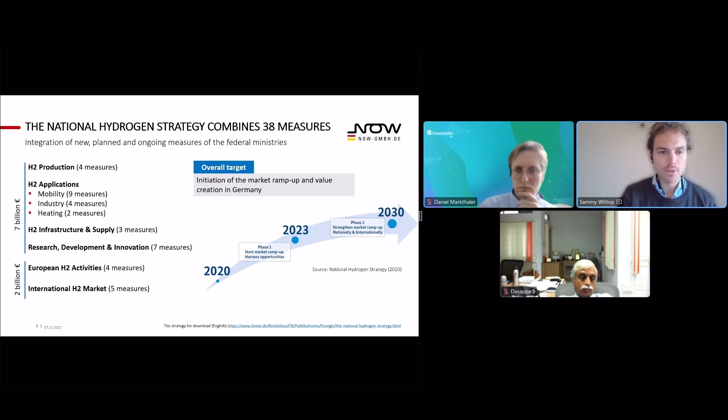This hydrogen strategy started in 2020. The first phase up to 2023 was focusing on the start of the market ramp-up in Germany, harnessing opportunities, making pilot projects in Germany, and from 2023 onwards to 2030, the second phase is focusing on strengthening the market ramp-up and also ramping up national and international hydrogen activities. But today we don't look at every measure. We look into the 9 measures of the mobility sector. And here you have an overview of all these 9 measures in these boxes.

And the color codes on top of the boxes are linked to the pictures on the right side. Black would be fuels, so measures related to hydrogen fuels and synthetic fuels. Red is infrastructure, so for example, the hydrogen fueling stations. And in yellow, you see the vehicles or applications related to hydrogen mobility.

The federal government uses these measures to orientate and implement their hydrogen funding programs to ramp up hydrogen technology in Germany. To give you an overview of some hydrogen funding programs...

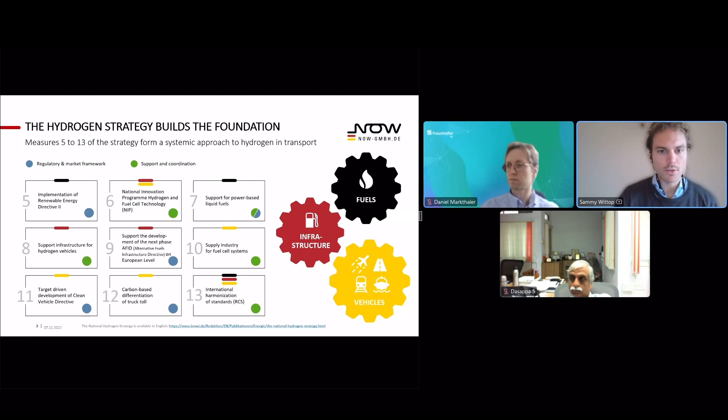We have a look into the funding programs of the Federal Ministry of Transport, BMDV. The BMDV focuses on funding programs along the whole hydrogen value chain, starting with hydrogen production and electricity-based fuels.

The funding volume here is up to 1.5 billion euros until 2024. Commercial vehicle funding guidelines have a funding volume of 1.3 billion, also up to 2024. Buses get funded up to 1.2 billion, also until 2024, and rail transport gets funding of 224 million euros.

In the lower part of this slide, you see the different funding programs of the Federal Ministry of Transport, starting with HyLand Hydrogen Regions in Germany. This is a very interesting integrated funding program which focuses on municipalities and regions in Germany trying to enable the whole hydrogen economy in their area. We will look into this funding program on the next slides in more depth.

IPCEI would be Important Projects of Common European Interest. It basically means we have large hydrogen projects, role model projects in Europe, which get big funding to showcase that the technology is ready and to see in which cases this technology makes sense in Europe.

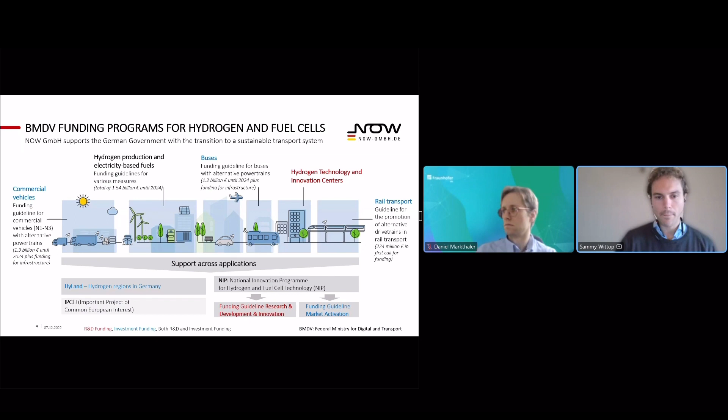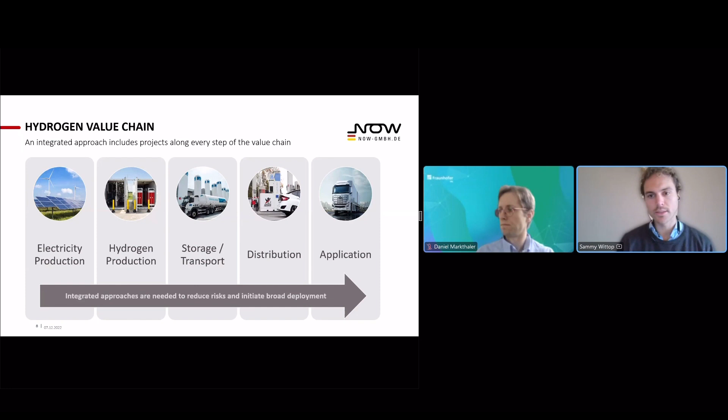With this said, I want to jump into the HyLand regions, the HyLand funding program. HyLand, as I said, is a funding program by the Federal Ministry of Transport, focusing on municipalities and regions in Germany which want to implement their whole hydrogen economy throughout the whole hydrogen value chain, starting from electricity production out of green energy, the production of green hydrogen, the transport and storage of this hydrogen, and the distribution of hydrogen through fueling stations, and also the different applications which can be tested through this funding program in the different regions, for example hydrogen buses, heavy duty vehicles. This HyLand program is focusing on municipalities to enable their own hydrogen economy.

This program has two, or more or less 3 steps. The first would be HyStarter. If a municipality doesn't have any experience with hydrogen, but sees huge potential in their region for hydrogen applications, they would apply for this HyLand program and start as a HyStarter to get experience from other HyLand regions and to think about ways to implement hydrogen in their municipality, in their city.

The second step would be HyExpert. HyExperts have a bit more experience in the hydrogen area, and they maybe already have some pilot projects ongoing in their regions. Through this HyLand program, they get funding up to 400,000 euros to create their own hydrogen concepts for the hydrogen economy in their region.

And the last step would be HyPerformer. HyPerformers are mature in the hydrogen sector, have already some hydrogen technologies implemented, and they're now implementing the whole hydrogen concept in their community.

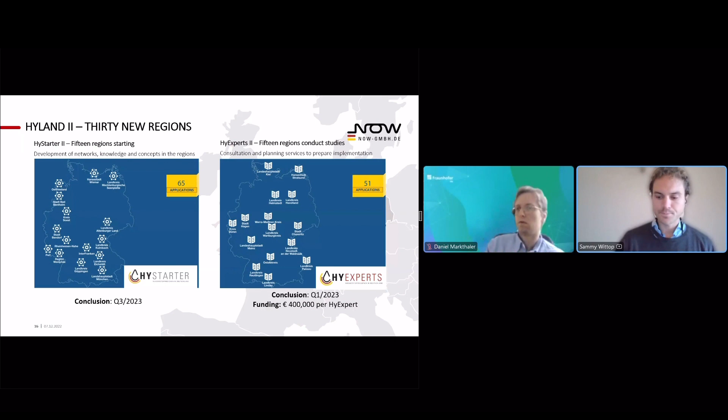To wrap up with this HyLand funding program, I want to show you its benefits. On the one hand, hydrogen regions start to talk about hydrogen, they work with hydrogen and think about how to implement it in their regions. We also have the connection aspect between the regions, so more mature hydrogen regions are somehow role models and share their experience with regions which are maybe not so mature in hydrogen yet. And we also have this huge networking character between all these regions, the visibility the regions get through this hydrogen network.

And to wrap up my presentation, I want to give you some numbers about the deployment rate and the infrastructure in Germany, the hydrogen infrastructure in Germany. These numbers are all based on funded applications.

Starting with fuel cell vehicles, current state November 2022, we have over 2,000 vehicles implemented in Germany, mostly via the funding program NIP, National Innovation Program. Fuel cell buses, we have around 70 buses implemented. Fuel cell trucks are 29 on the road right now. Forklifts, so intralogistics, is a very quickly growing market where you have 180 forklifts implemented plus 150 are in implementation right now.

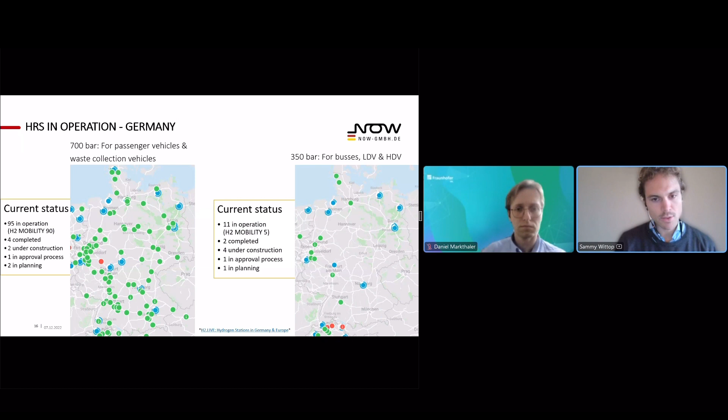To make this more visible for you, I want to show you these two graphics of Germany. On the left side, you see the 700 bar network for passenger vehicles. Passenger vehicles need more compressed hydrogen because they have smaller tanks. And the 350 bar is for buses, which have larger tanks, so they don't need such a high pressure level. Interesting here, on the left picture, you see the western part of Germany has the most dense infrastructure of refueling networks, because there's a lot of industry in this area, so we need a lot of refueling stations here.

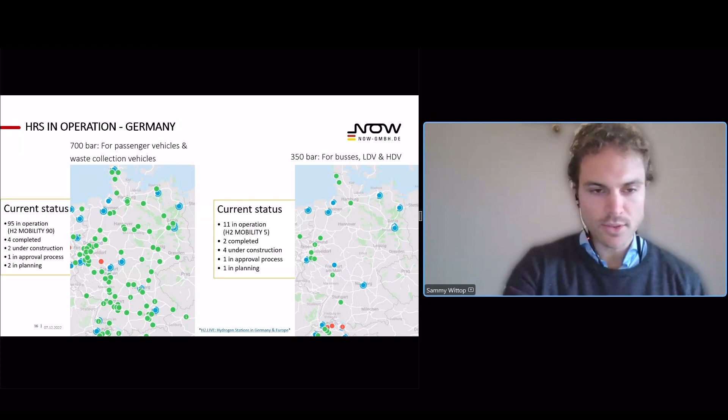So I hope I could give you some insights about the current situation in transport in Germany. If you have any questions, feel free to contact me. Thank you.

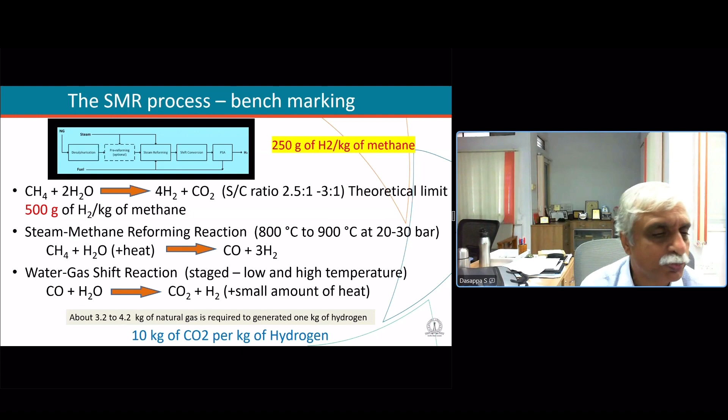In this broad description about the institute where I come from, when we really look at any of these hydrogen or hydrogen related aspects, one very clearly, I think it also came up during the early part of this meeting, is the so-called steam methane reforming as a benchmark. If you look at the chemistry, you theoretically can get close to about 500 grams of hydrogen per kg of methane, but in an actual system, depending upon the capacity, you can get anywhere between 250 to 300 grams, or equivalently about 3 to 4 kilograms of natural gas is required to generate a kg of hydrogen, during which the possibility of emitting close to about 10 kgs of CO2 is expected.

And apart from being hydrogen, I think it also becomes a derivative for various downstream chemicals, which we keep seeing in industrial applications. To some extent, I should also say that there are challenges even for an SMR process, which has generated hydrogen rich syngas, and separation and meeting the requirements of a fuel cell is a tall order. This is something which we need to keep in mind.

Most of the fuel cells which have been operated have used other resources, which you get clearly from electrolysis or something similar. But very limited work has been done to see whether an SMR process going into a fuel cell is feasible - it's not that it's impossible, but very limited work has been done. Keeping this in mind, I thought I should introduce another fuel called biomass, which is a carbon-hydrogen matrix, one of the other naturally available resources wherein you have hydrogen as an element, like water is another natural resource.

When we really want to compare biomass with methane: biomass contains about 65 grams of hydrogen per kilogram, while methane has about 250 grams. And water, as mentioned previously, has about 100 grams of hydrogen per kg of water. This is what you can really look at.

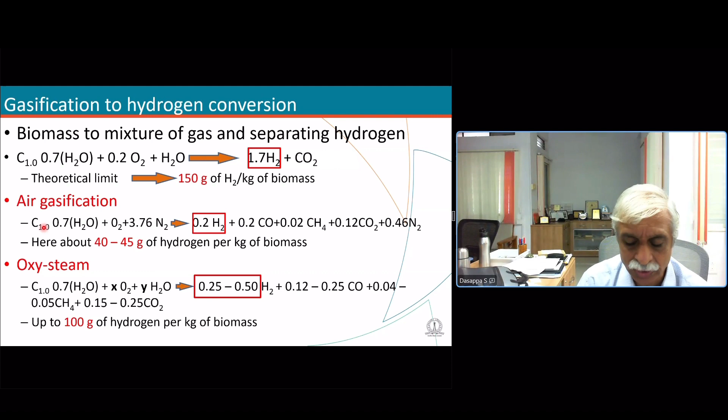But at IISc, we have been able to achieve in excess of about 100 grams of hydrogen per kg of biomass, building on our earlier work on air gasification and moving into oxysteam, so that nitrogen can be eliminated.

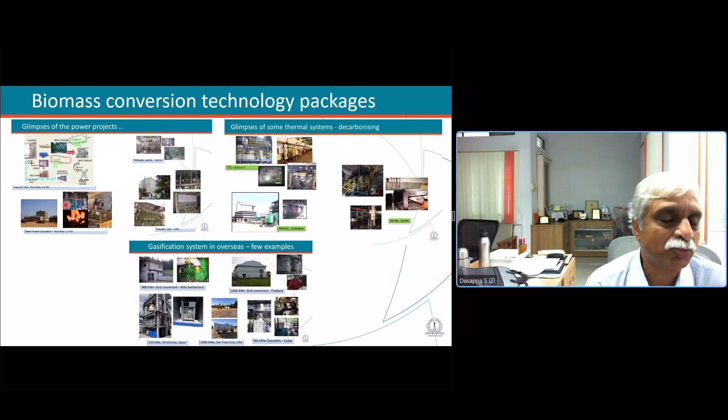The work we've been doing is not far off from that in terms of scaling and other aspects. That means even if you want a scaled-up version for hydrogen, there should be a possibility. The gas quality shown is capable of operating turbocharged engines, which probably is still not as acceptable for a fuel cell, as you'll see in the subsequent slides.

From biomass, you have CH1 to 1.4 as a carbon to hydrogen ratio. Unlike steam methane reforming, with air gasification on a molar basis you get a CO to H2 ratio, and with oxysteam you can control it further. This is very useful when you want to synthesize this gas into chemicals. The CO to H2 ratio can be controlled so you can get into methanol or other downstream products.

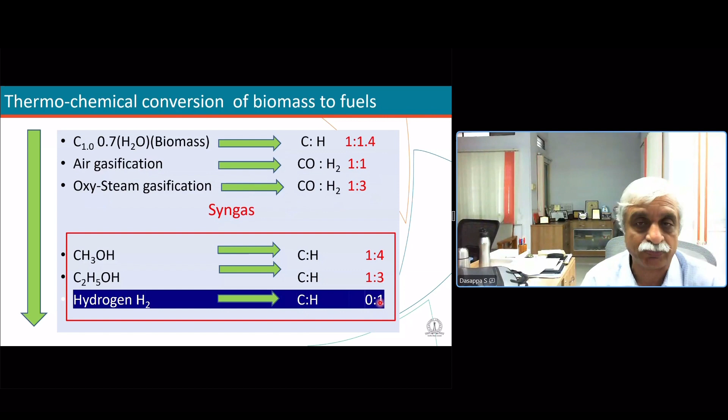When we go into so-called hydrogen production, all the carbon needs to be eliminated so that you're left with only hydrogen. Today we have achieved a process where, with process control parameters, you can achieve different gas compositions by controlling the process within the system.

And we have tried out with a medium density like wood chips, a very high density called coconut shell, and a very low density called corn cobs. I think these are the feedstocks which have been used, and we have been able to get gas compositions, and all this data is intermingled with all the three processes which are there.

And this is what we want to see: whether we can replicate what an SMR process is doing with a fossil fuel using a biomass which has a very low C to H2 ratio. I think it's something which we have been looking at. That means we can look at all the necessary chemicals which can be generated using similar things.

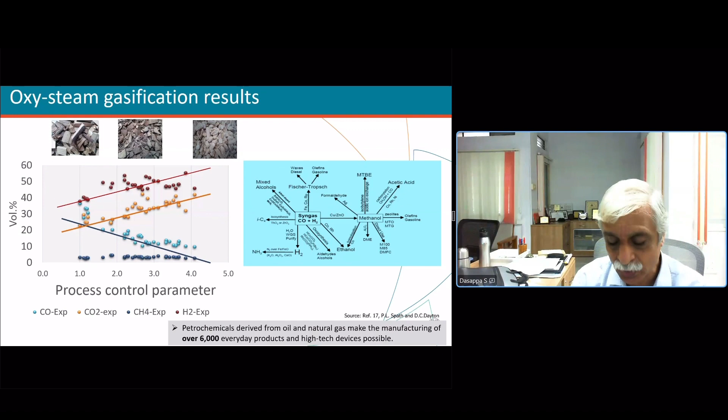Our major target was to see whether we will be able to get the so-called specifications for fuel cells. I think that has been a challenge, probably not only in India, across the globe actually. Today we have been able to meet the ISO specifications to operate a fuel cell using hydrogen generated through a thermochemical conversion process, and we have established the entire protocols for evaluating this quality.

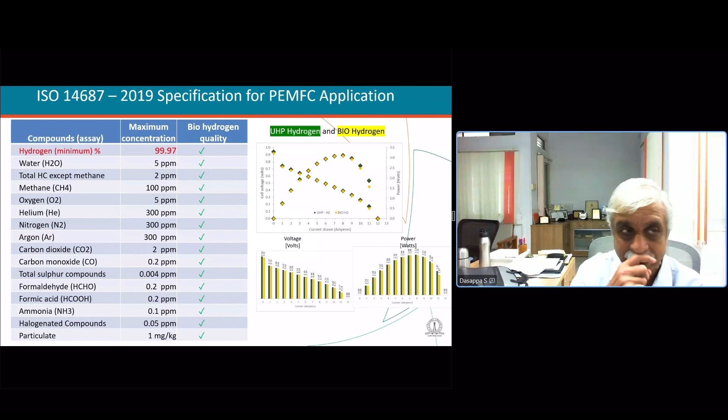We believe that today the technology is available, and as far as IISc is concerned, within the Indian context, we are wanting to set up a 10 kg per hour hydrogen generation capability to fuel a fuel cell bus, which is going to shuttle between some very important places in Delhi. This is something which is coming up.

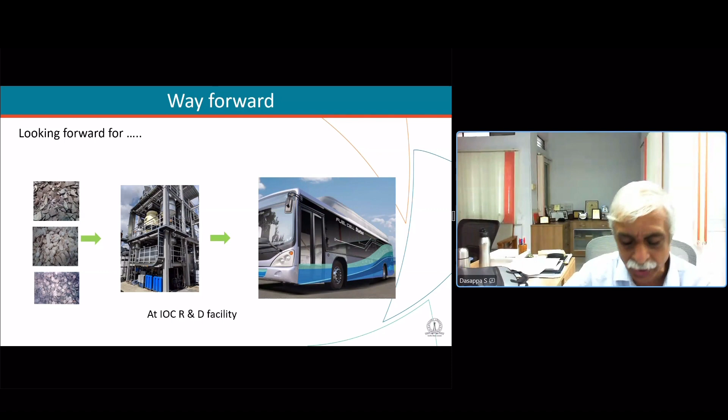While I'm talking about the technology, there is also a concern showcased by various groups across the globe asking whether biomass-based generation of hydrogen is green. And if you really look at the global warming potential, if you have a rotational crop of 1 year, the GWP is 0. And even at the end of 10 years, the factor is 0.04. I think this is something which we need to be aware of.

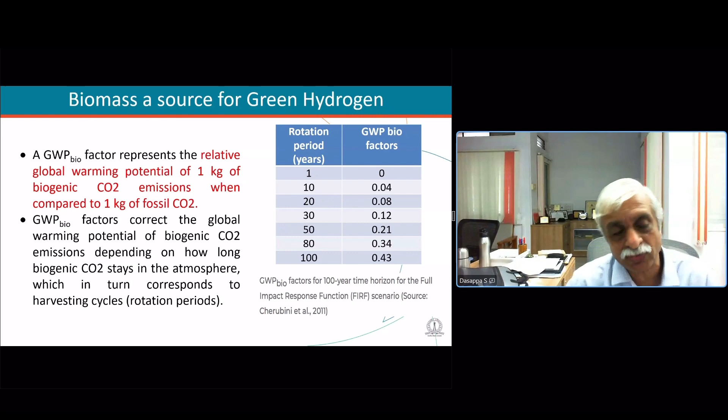And with the kind of technology that has been developed today, probably we can be carbon negative, because CO2, which is coming out as a mixture with syngas, can be separated out for utilization. And we can also sequester a certain carbon amount, activated carbon, which comes out as a byproduct, which can turn out to be a carbon negative process. This is something which I thought I should share with the larger audience.

I think I'll stay put here and look forward to any questions or observations on this. But I should say that very few groups across the globe have been talking about biomass. India being an agro-based economy, and there are many other countries across the globe which will be able to do this.

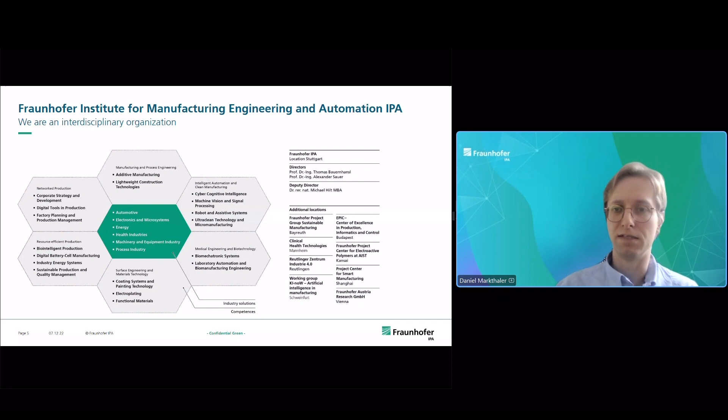On the other hand, we are concerned with hydrogen technologies in production, such as manufacturing of fuel cells and electrolyzers, and also recycling is a big topic. So where we ask ourselves, okay, what happens with the key components at the end of their life?

And at the IPA, there are several hydrogen projects where a lot of groups contribute, but in principle, you can cluster them in 4 main sectors, I would say. One is biological hydrogen production based on biomass. On the other hand, production planning and automation, such as the factory planning for fuel cells and electrolyzers. Especially robotics are of importance.

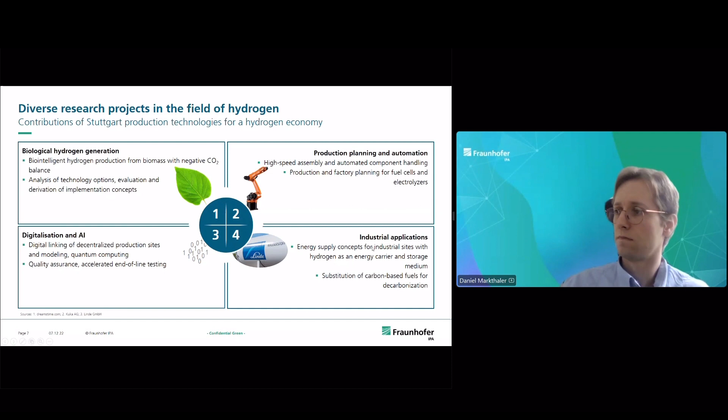So I'll start by giving a quick motivation for the project. All of you know combustion engines are involved in several energy sectors, such as automotive or energy production. And you also know, to reach our climate targets and to prevent further global warming, this situation has to change. So there are a lot of efforts to replace combustion engines, such as diesel engines, with battery and fuel cell technologies currently. So we are in a kind of transition, which will still last a couple of years.

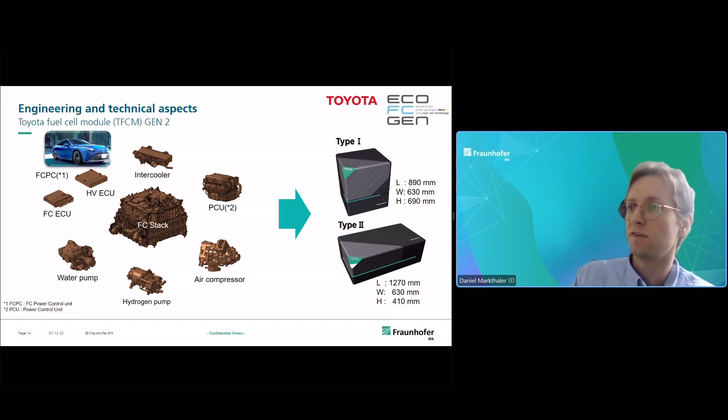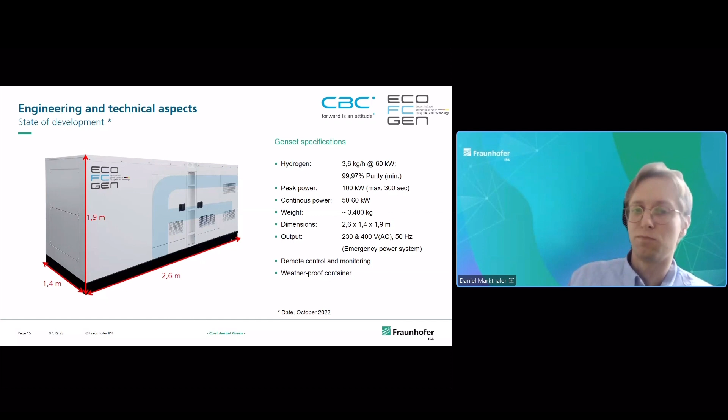Here, on the right-hand side, you see some technical specifications. So this genset will deliver between 50 and 60 kilowatt continuous power. For shorter times, it can also deliver up to 100 kilowatt, which is due to the battery. It requires 3.6 kilogram per hour of hydrogen at 60 kilowatts with high purity. And the idea is, for this project, it will be controlled and monitored completely remotely. So there should be no babysitting necessary, in principle.

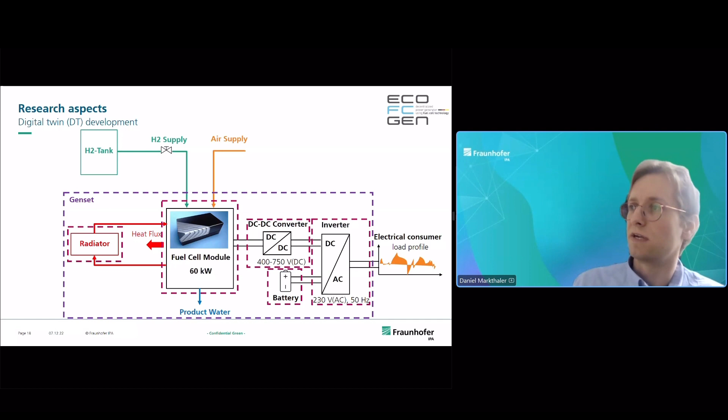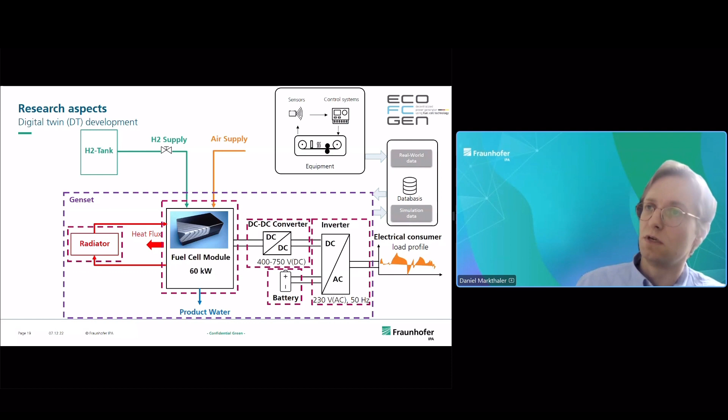As I outlined already, one of the major research aspects will be the development of a suitable digital twin. Here you can see a schematic diagram of the major components with the fuel cell in the middle, the power electronics here, cooling system here, and if we put in the system boundaries, you see this is the genset in principle. And now if you want to model this, the first thing you have to do is you need models for all the major components, validate them, and then bring them together. And once this is done, you also have to think about interfaces such that it can communicate with the sensor data obtained from the real device. So this shows you the concept of the whole digital twin.

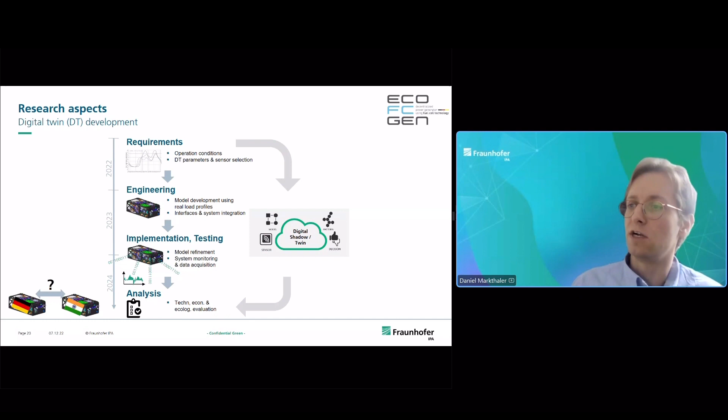And all the data which are collected during these field tests from the two prototypes in Germany and in India will be analyzed in the last stage of the project. And as I said, we will try to correlate this also with the different environment conditions and lifetime and performance differences.

And the second aspect, and this is mainly done by the University of Bayreuth, will be the development of suitable circular economy strategies. So for this, it's important to keep in mind that currently the stack lifetime is really one of the limiting factors for the commercialization of fuel cells. And what will be done in the scope of this project is to develop a decision tool based on sensor data, which allows you to detect if a certain component has a problem, and then also to suggest and identify proper circular economies. So if we see a certain component has a problem, we have to replace it. But what happens then? Can we repair it? Can we refabricate it? Does it have to be recycled? Such things involve economic and ecologic considerations, of course. And the idea is that the whole operation time is optimized and becomes more sustainable also.

And now I would like to give an outlook. What can we do with this genset once it is done? So as you see, the heart, the major component is the fuel cell. We have then our genset. It can deliver heat and power. Heat can also be of value. It could also be used as a fast charging station for electric vehicles, for example. But the question is also, how can you implement such a device into a whole green energy concept?

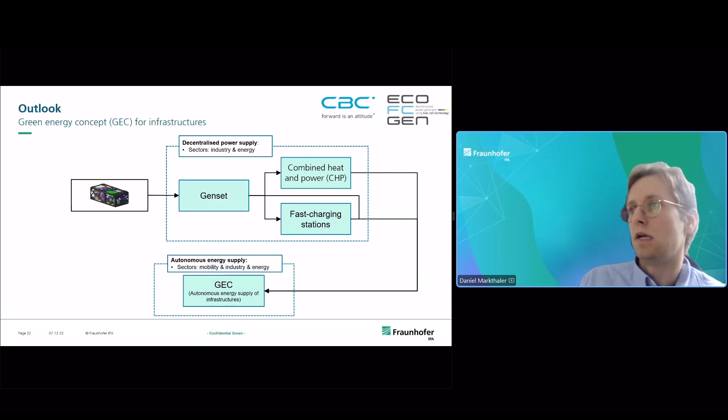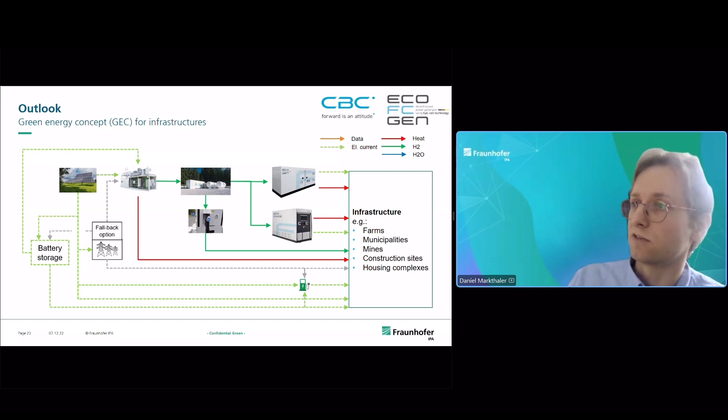Also, in the electrolyzer stage, you have a lot of excess heat, which could be used. The electricity from the photovoltaics could also be used directly, for example. Then, in between, there can be a battery storage, and you also might have fallback options from the electrical grid. And of course, there's also water produced in the fuel cell, which can be used, for example, for the electrolyzer.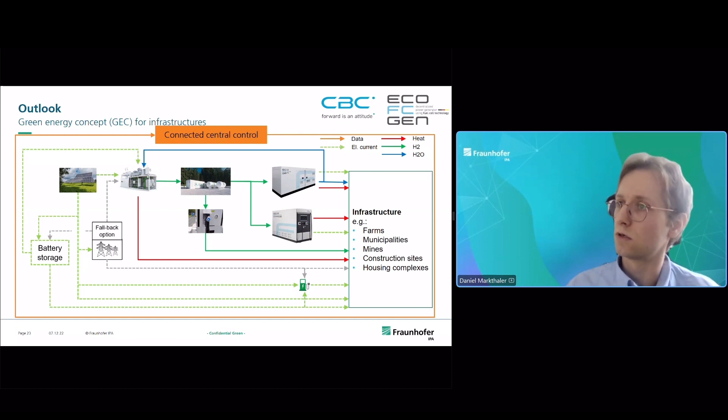And to connect all these things, what you really need, if you want to design such a kind of microgrid, is a smart central control system. And I think such solutions have a great potential to provide a valuable contribution in the energy market. And there's a lot of developing potential currently.